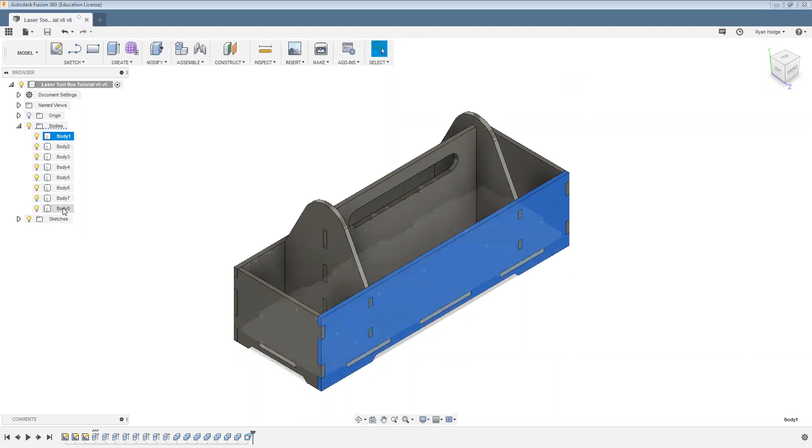So the last things we'll do in Fusion before outputting to our laser machine is we'll create components from the bodies. So to create the components, you can use the Shift key to select all the bodies, right-click, create components from bodies.

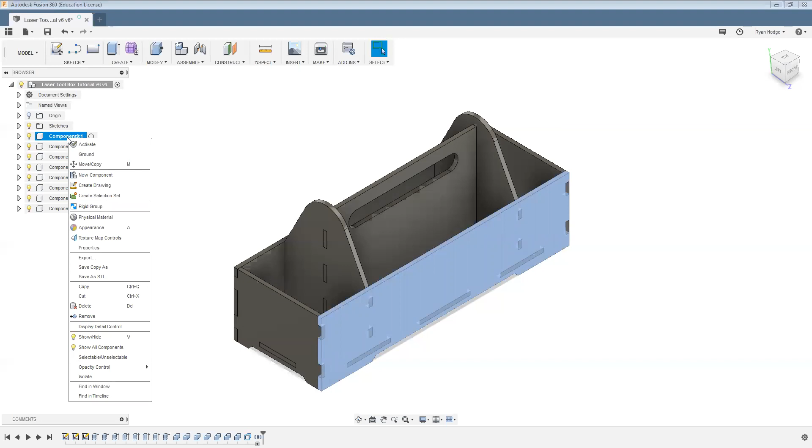Now, if we want to take the time to, we can go back in and rename each of these. But for an item that's this small, I don't really think it's necessary. You can also add a physical material. So I've selected pine from the wood library. You have a multitude of materials to select from.

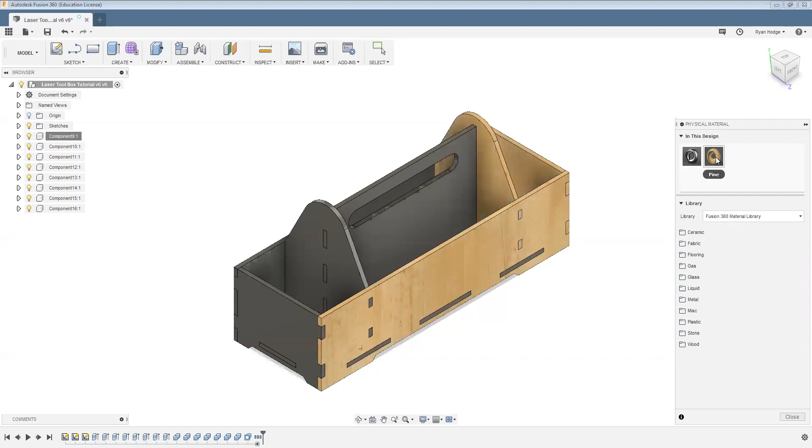And if you drag this over and drop it onto various components, it'll switch the material. Not totally necessary, but it helps us kind of visualize what the box is going to look like. It also, if we're using it for engineering purposes, we can see what the material properties are, do stress analysis. But for now, it just helps us aesthetically.

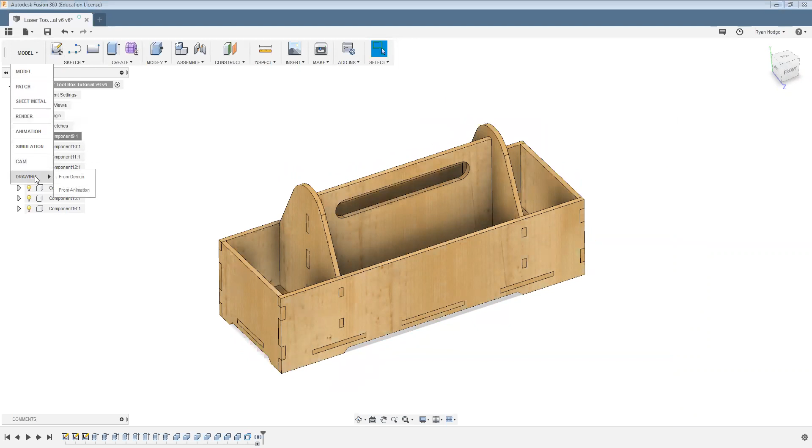So we'll go ahead and create a new drawing by going over to workspaces. We use the drawing workspace from design. And I find it's best to select the largest drawing size platform. And we'll do OK. Drop that in.

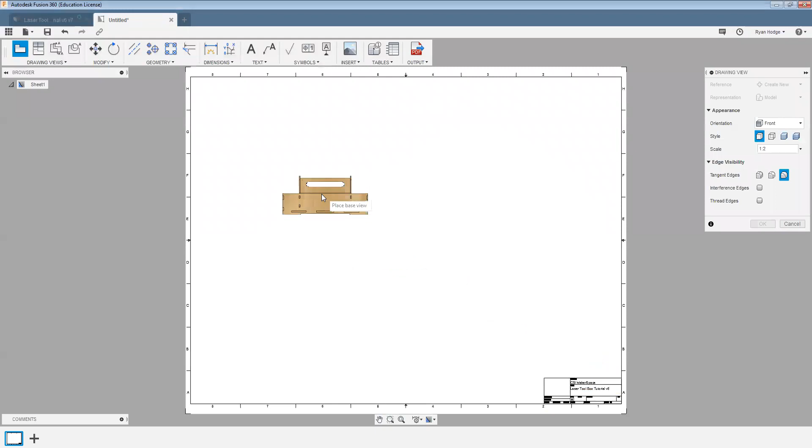I also find it's best to remove any extraneous information like dimensions or the drawing template. And we are going to want to be full scale for this, so we don't have to modify it later. Okay. And we'll come over here to the sheet settings, turn off all that extra info.

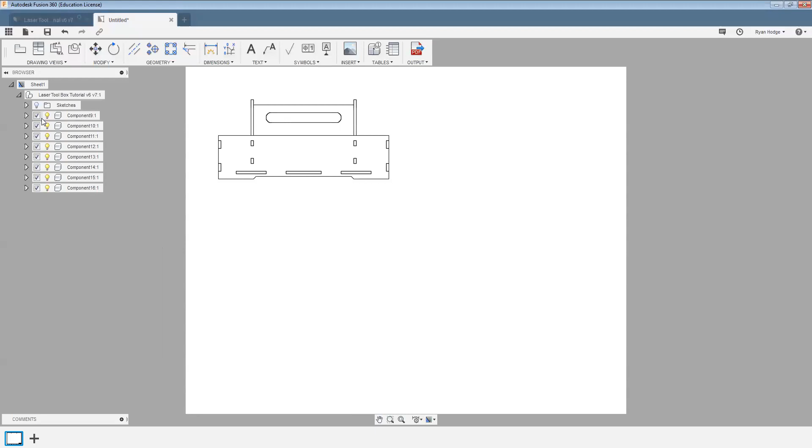So now with Fusion, we need to deselect everything that we don't want to see or that we're not going to use. We're trying to get just to the base part so that when we output it to the laser, it's going to cut out that part.

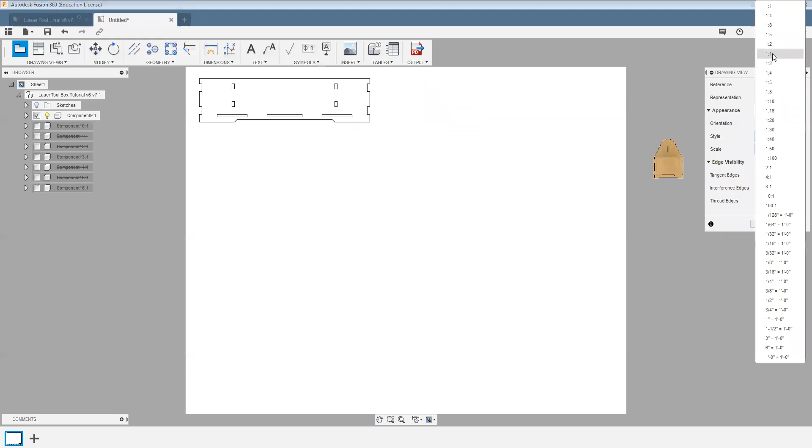So to continue on, go back and select a new base view. And this time we'll do a left-hand side view. Make sure it's full scale. Drop it in place. Okay. And we need to deselect the components we're not going to use. Escape.

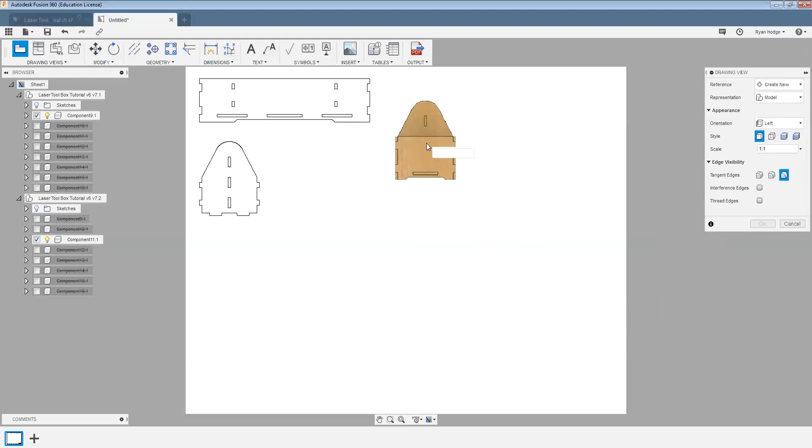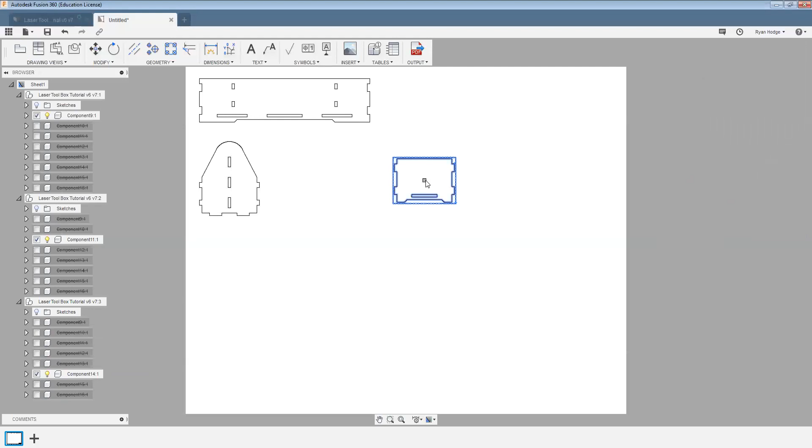Continue doing this for all the components. Full scale. Drop it in place. Okay. Deselect. I want that side, so I'm going to drop that in place.

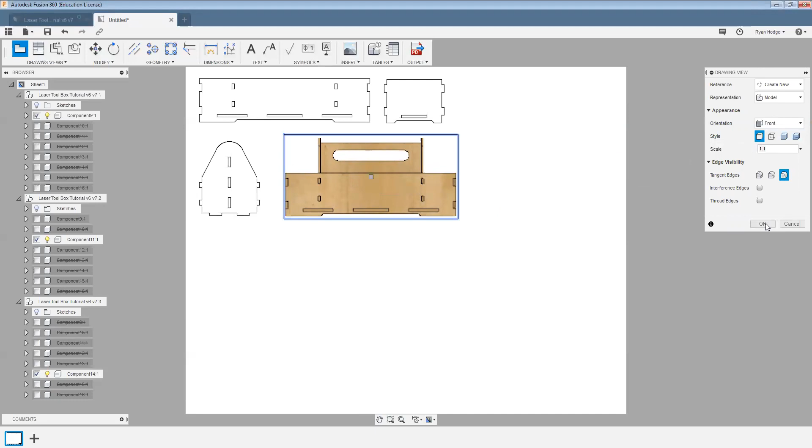We're down to, I don't need to drop in two of the repetitive components because we can copy and paste in Adobe Illustrator. It's a little bit faster. So I need the center, the handle. You can minimize these previously done windows so we can see everything better.

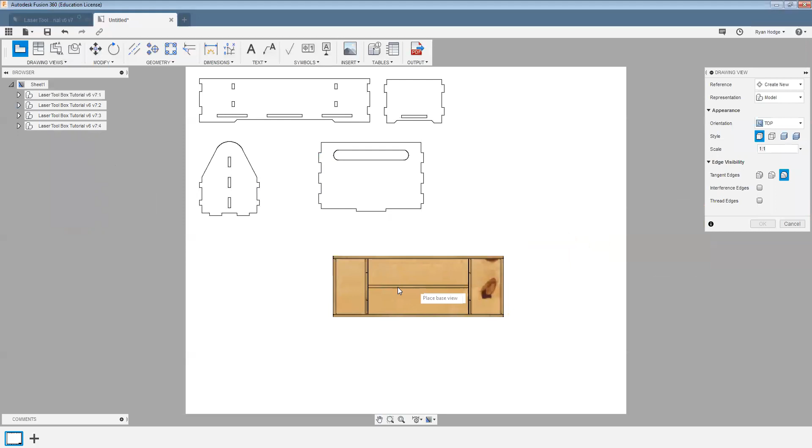We have the handle, and now we're just lacking the bottom part. So one last part. And we want the top view, full scale. Drop it in place. Okay. Deselect the unwanted views.

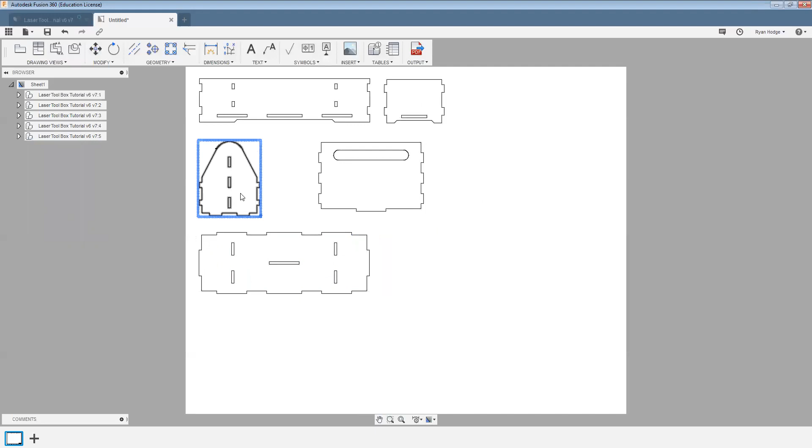So now we have a 2D representation of all of the individual part profiles that will make up this tool tote. We can double check that we have everything. So I have the side, another side, handle, internal partition, bottom, and good to go.

Now I'll output as a PDF. And I find it works best to keep the line weights. And it also works best if we do current sheets. If we have multiple sheets, it makes for a cleaner print. We'll drop it into our download file. Save.

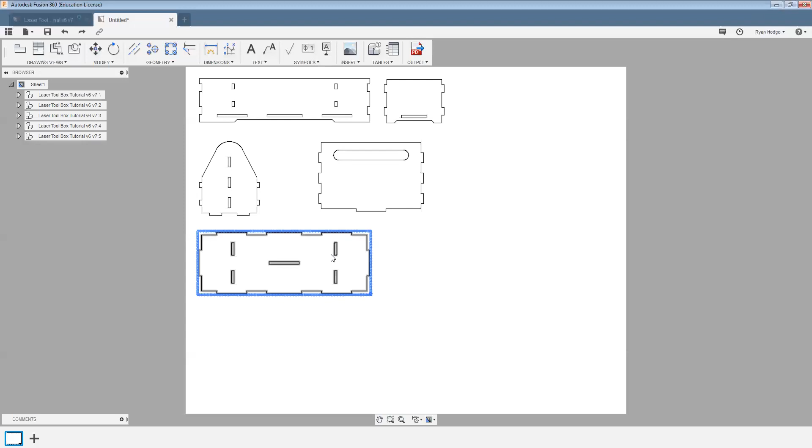So now we're ready to move on to Adobe Illustrator to prep these profiles to be cut on the laser. That concludes the Fusion 360.